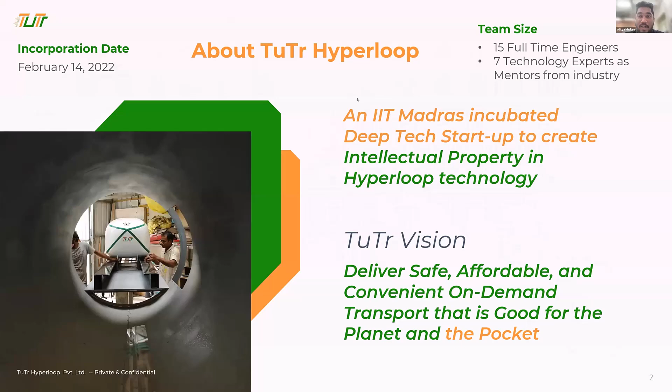We have one such expert from industry, from BARC, and there are a lot of people who have been helping us. We are gracious to them along with the industry partners.

Now I'd like to talk about the founding team. We had three co-founders: Dr. Arvind Bharadwaj, formerly Chief Technology Officer at Mahindra and Mahindra, who took a sabbatical and joined here. Professor Satya Chakravarti, a professor of aerospace engineering at IIT Madras and a serial entrepreneur with other startups like E-Plane Company, Agnikul, and Aerostrovilos. E-Plane Company is working on air taxis, which just got a $1 billion contract. Agnikul is working on 3D printed space rockets, which also launched their first rocket last year. And Dr. Balaji Rangachari, who was SVP at Mahindra, came from industry to work on the Hyperloop segment.

As for now, the progress is: we have built a vacuum tube of 410 meters at the IIT Madras Discovery Campus, built with the gracious help of Indian Railways, ArcelorMittal, L&T, ANSYS, Dassault, and other industry partners. Everyone came together, and this can be termed as a very great example of industry-academia collaboration.

This is deemed to be the world's largest facility, with Indian Railways sanctioning a revised grant of $1 million, and the length of this tube will be extended to 450 meters. After 410 meters was sanctioned, we did not realize there was a lake after that. Now L&T has taken over construction, and they are going to build the remaining 40 meters, which will make us the longest in the world.

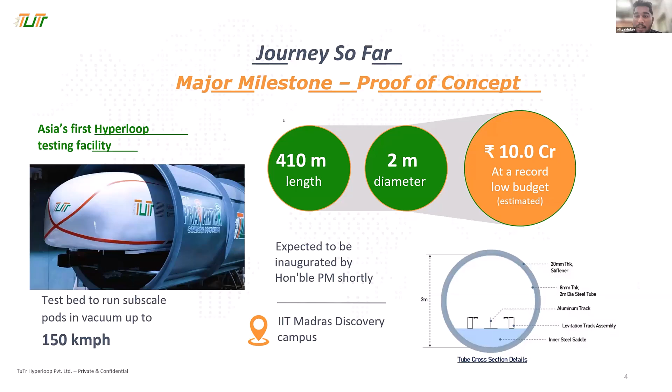One key thing is that comparing it to the West, we have significantly reduced the cost of construction of the tube. The initial capital cost of such infrastructure is termed to be very high. You can see the pictures here - like be it metro, be it any high-speed rail, be it bullet train, the infrastructure cost is something on which we have taken a very keen R&D role.

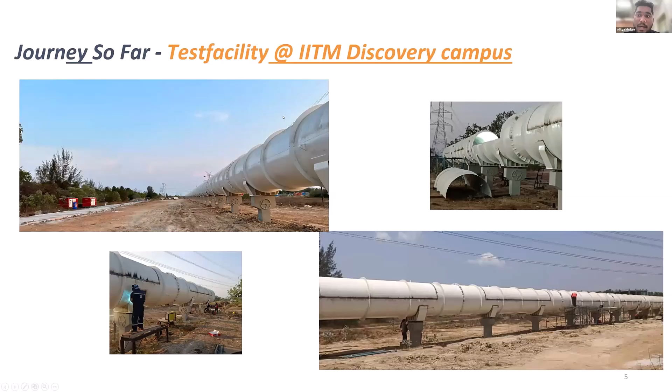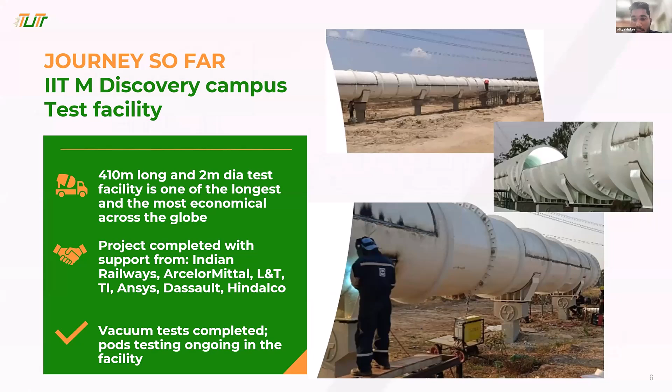We have made sure that the infrastructure remains passive and all the technology is transferred to the pod, hence reducing the infrastructure costs drastically. That is what we have done, and we have also patented it. We have reduced the thickness of the tube, which in the West is 16 mm, down to 8 mm, again reducing the steel cost.

This was our first gen pod; now we are on our 6th gen pod. This was our first gen pod during the initial testing in the tube, where we did linear propulsion, completely made in India with a 1.5-ton Ashok Leyland chassis. On the right side, you can see the 30-meter track at IIT Madras, and on the left side, you can see the tube where testing and trials are currently going on. The base has completely shifted to the tube, where now the final testing is going on.

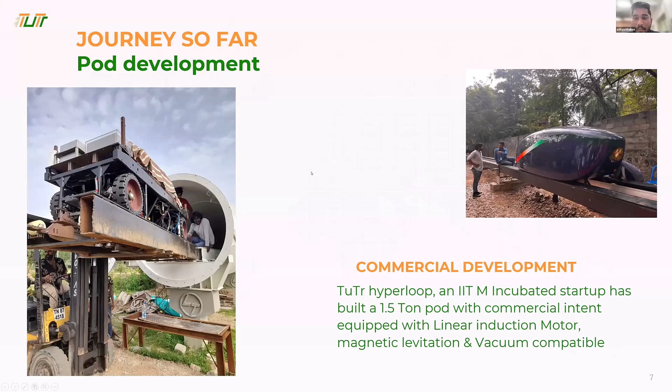We had a number of collaborations as we started this journey. The initial one was with Tata Steel, who our journey started with, and then slowly we have also collaborated with other Hyperloop companies around the globe, with the gracious help of the Government of India. We also tied up with L&T, recently tied up with Systra, and tied up with Technical University Munich. That is how we are making this a consortium approach. We don't want to go alone in this, because this is a whole lot of a goal where a lot of efforts are required, so we are taking a consortium approach.

ArcelorMittal has been graciously supporting us in this journey, along with Dassault and ANSYS. So industry partners are also coming together along with academia to drive this together.

Someone was saying that a route has been planned between Tata and Ranchi in Jharkhand. People have been texting us, how are you planning this route? When are you planning this route? This is all media hype on the routes. We officially are currently focusing on cargo, and eventually we'll move on to passenger.

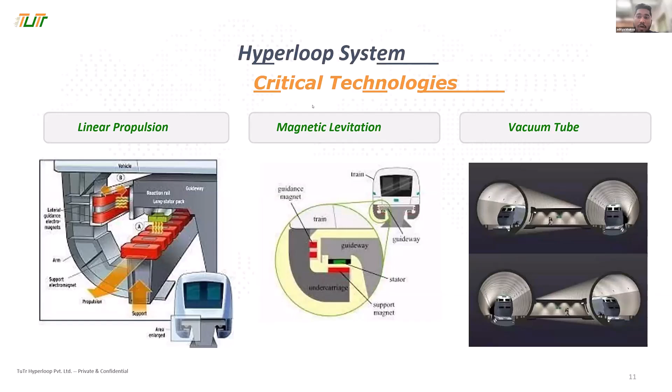So these are three key component technologies which we are focusing on, and we are focusing on a phase where we earn while we learn. So we are not just doing R&D, we are also doing application-based identification on how do we deploy this technology in the current railway system. So linear induction motor is one such thing which we think can be a good use case in mountain railways. This can be a good use case in metros, because the less the moving parts, the less the maintenance. So this will drive down the maintenance cost and will enhance the operation, and again, speed.

So with linear propulsion, we can go up to 200 kilometers per hour, 0 to 200. With maglev, we can go up to 400 kilometers per hour. And if we need vacuum, then we can go up to more than 400 to 600 kilometers per hour. That is how we have divided these technologies.

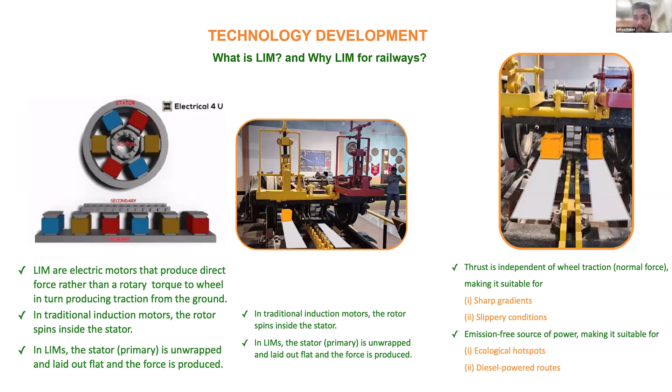So like I was talking, some potential applications for the linear induction motor and maglev. If we do not go for vacuum, that is not necessary. We can add it if we want more than 400, 500 kilometers per hour. But a thing about India is, anything around 200 or about 200, we can consider as high speed, because we don't have that infrastructure yet.

So our current focus was on ports, airports, and other key areas where we could implement these technologies to increase the efficiency, turnaround time, and speed of the supply chain. Let's say a container has to be evacuated from the port to a container yard, which is 8 kilometers from the port. The linear induction motor based automated system can do it within 5 minutes.

Like, there are a lot of greenfield airports coming up in the country which are far from the city - Jewar at Noida, Navi Mumbai, and Parandur in Chennai. So these have a distance of around 30 to 50 kilometers from the existing airport. What if the government wants to make this one single airport? So we actually connect the two airports with a linear induction motor and maglev based corridor, and the good thing is the same infrastructure is scalable.

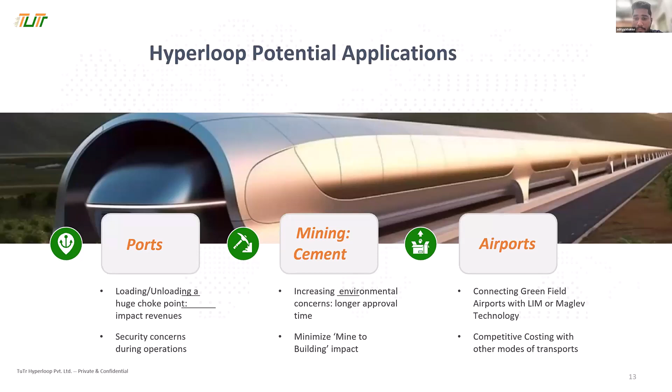So the good thing is the same infrastructure is scalable. So I need not create new infrastructure for each technology. I can scale the same infrastructure I have if I have mastered my LIM, to maglev, and from maglev to vacuum. So these are some potential use cases.

So again, I do not need to say much, these are some advantages of having Hyperloop technologies. And I'm not just talking specifically about the full-scale Hyperloop stack, which consists of vacuum, maglev, and LIM. These are the advantages of all three stacks of Hyperloop technology when I talk about linear induction motor, maglev, and Hyperloop.

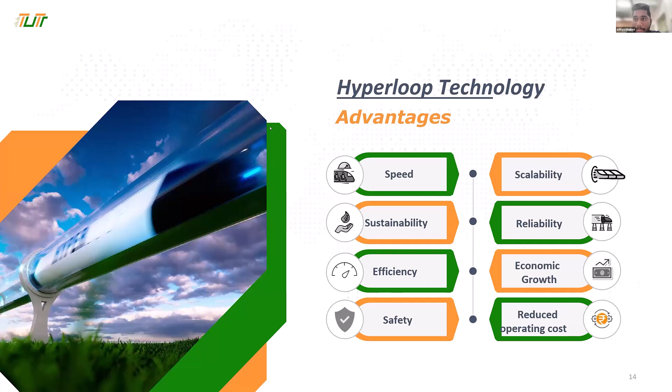Since there is no standardization of Hyperloop tracks across the world, we have taken this on ourselves along with Indian Railways to standardize this. There is a constant mindset that whatever the West does, whatever standards the West sets, we follow. We have taken upon ourselves that we will set a standard for this and let the rest of the world follow, because we have the technology here, the resources here, all the backing here, and potential use cases here.

For Europe to prove anything on a Hyperloop, they have to go at 400 or 500 kilometers per hour because they already have trains running at around 350-400 kilometers per hour. For us, if we start with a linear induction motor, we start with 200 kilometers per hour, scale it to 300, 400, 500, then eventually, if required, 600. So that brings us the market.

We have the resources here, all IITians, all from top colleges of India, students working here. So it's a complete landscape, and most of all, the industry is backing us full time. We have a full stack backing along with the resources required. This is something we are proud to take up, that we set the standards and the rest of the world follows.

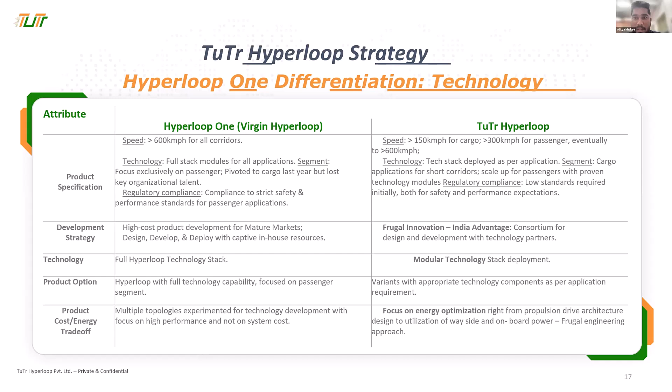And I think that is the last slide. So that is how I close my session. I would be open to questions now.

I think there are some questions in the chat. Thank you, Aditya, for that quick but very, very impressive introduction to what is being done in India. And I think there is something in the air of Chennai. Train 18 has also come out, and I have a feeling that the actual Hyperloop on the ground will also come out of Chennai only.

And it's so nice to see that a very comprehensive ecosystem is being developed, which is very much a requirement for a complex industry like railways or transportation systems. And you have taken a very practical approach of first going for cargo, and then as things develop, go for passenger traffic. So people are hungrily waiting for your product to come out. Even people in Tata and Ranchi are looking forward to it, after you finish your cargo, then you go to passenger, and they're already asking for that. So best wishes to you.

One technical question comes to my mind before I go to the chat box: everything is being tried currently for a linear route, but later at some stage you'll have to have routing, junctions and other things. So are you simultaneously working on that, or is it on the back burner at this moment? Because you'll have to have a point where, in railway parlance, we have a point for going to different routes.